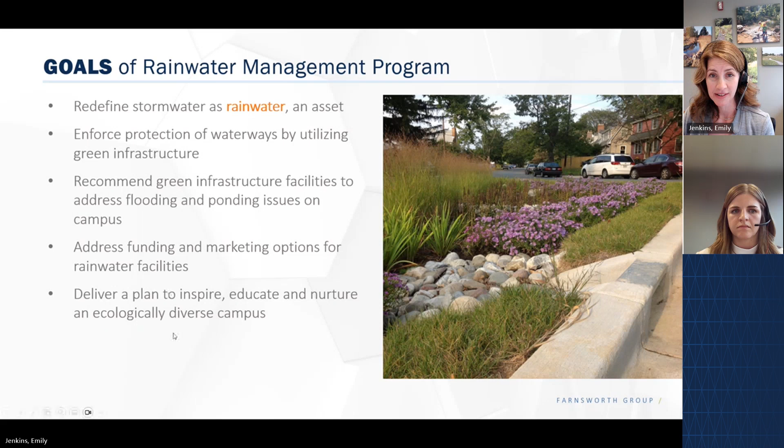Our approach consists of four main steps: first, to gather the data; next, to understand existing conditions; then to analyze proposed conditions; and finally, to compile everything together to create a plan that's usable and relevant.

And now Grace will walk you through how we gathered information to begin the process.

The first step was to review previous studies and plans, such as the Campus Master Plan and Campus Landscape Master Plan, and make sure our recommendations were consistent with those plans. For instance, we needed to be sure that we weren't proposing a new detention basin where one of those plans was proposing a new building.

We reviewed a GIS layer provided by the university and identified where we had questions, and from that, where we needed to gather additional survey data to fill in those gaps. The university has several green infrastructure facilities already, so we worked with them to track down that as-built information so we could model those facilities accurately.

Any remaining questions, we were able to pop over to campus, get eyes on the situation, and get the clarity we needed to keep moving forward.

And finally, we really needed to understand how the system behaved in the real world. So we held an open forum with campus facility managers where they could share their feedback on what they were seeing on a routine basis. We decided on a virtual platform where we introduced our project, and then facility managers could either drop a comment online on this wiki map I have shown here, or they could stay in the meeting and voice their opinions, thoughts, and issues of what they've been seeing. These forums provided really valuable discussion, all of which we summarized in the following table and chart on the next page.

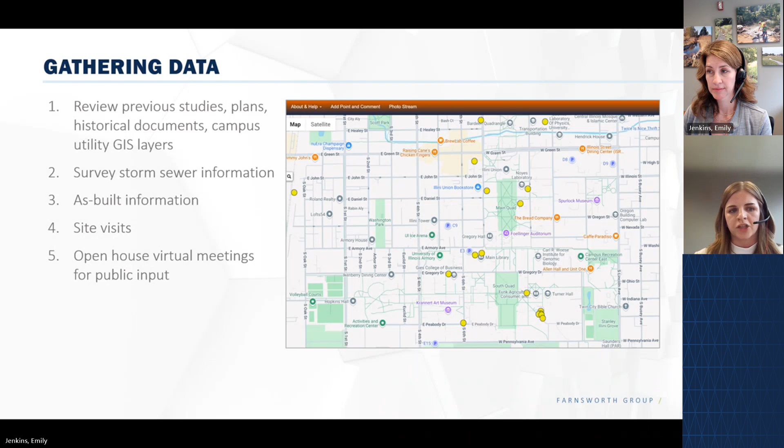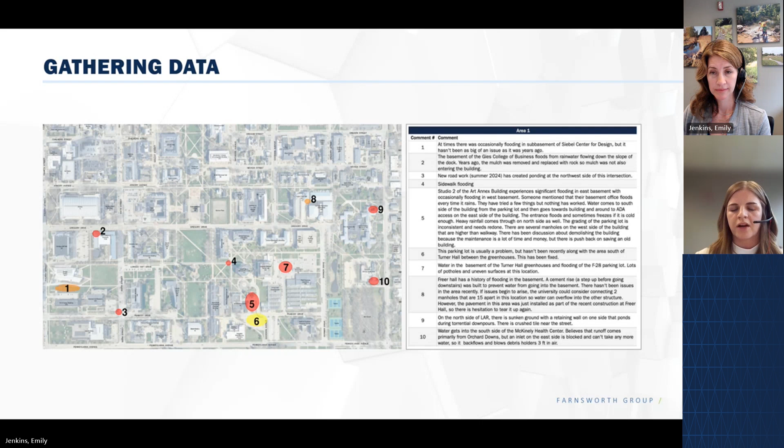With this map here, this helped us verify what we were seeing in our existing condition model. And then in the proposed phase, we made sure to come back to this map and make sure that our proposed recommendations were addressing all of these issues.

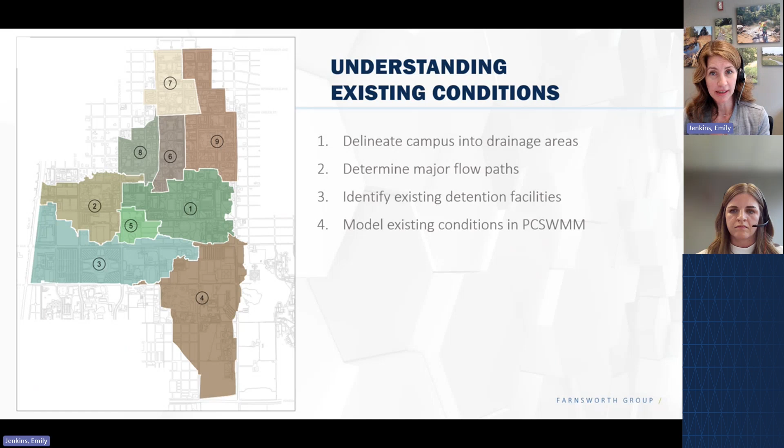After gathering all of the relevant data, we then began to put it together to understand how current conditions operate. We started by delineating the campus into 9 drainage areas, shown here in the different colored shapes. Each drainage area flows to a single outlet point and is similar to the regions that were identified in the campus landscape master plan.

Next, we identified major flow paths that are shown here in the dark black lines. Most of the drainage areas flow to the Boneyard Creek, either directly via overland flow or through storm sewer piping within Champaign, Urbana, or campus. The Boneyard Creek is in the northern part of the campus, shown here as a thin blue line on this map towards the upper part.

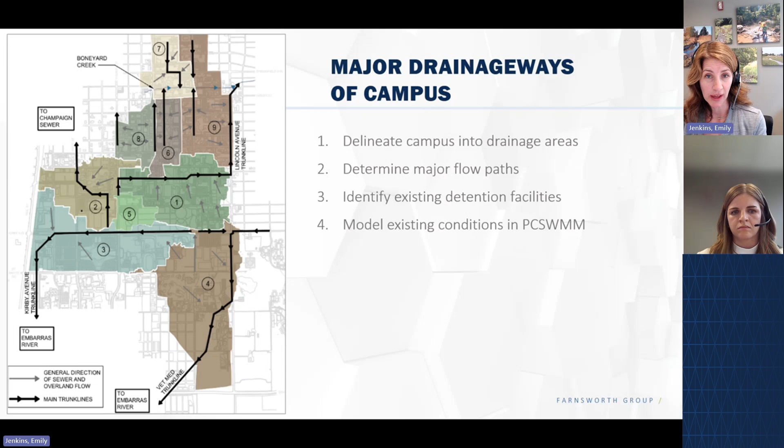Two areas, areas 3 and 4, drain south through large pipes called the Kirby Avenue trunk line and the Vet Med trunk line to the headwaters, or beginning, of the Embarras River.

All the existing detention facilities were then identified and mapped, and they're shown here in the shapes of cool colors. The university currently has several large regional facilities to manage rainwater, but they're not retaining and infiltrating enough rainwater to meet the current standards to protect downstream waterways.

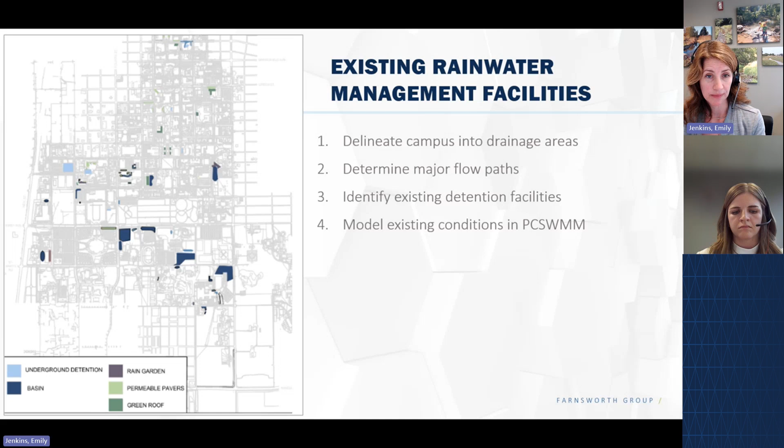Finally, we modeled the existing conditions within a modeling software called PCSWMM. All of the lines and circles shown here represent storm sewer manholes and pipes. This model can tell us where flooding occurs, which manholes surcharge—meaning which manholes have water coming out of the top—and what rate of water is leaving each area for a particular rain event. This model was used to identify locations of ponding and flooding, and was also used as the basis for adding proposed green infrastructure facilities to the campus to meet the university standards.

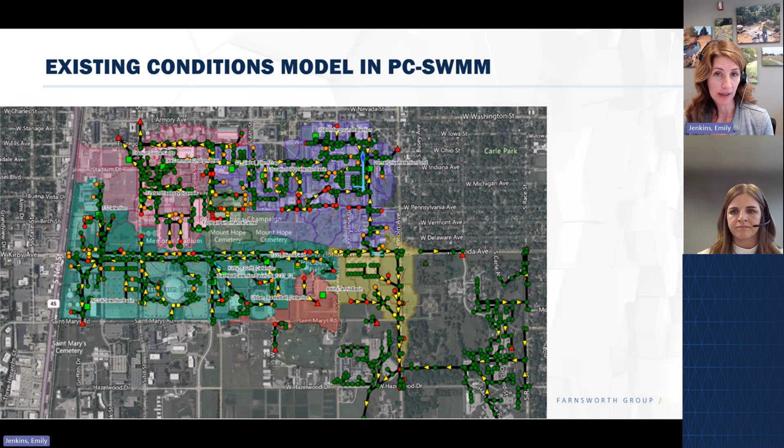A quick note about rainfall: the rainfall used in all of our analysis was the 100-year rain event, which has a 1% chance of happening every year. The most up-to-date published rainfall data were used for the analysis, which is 3.49 inches of rain falling within a 1-hour period.

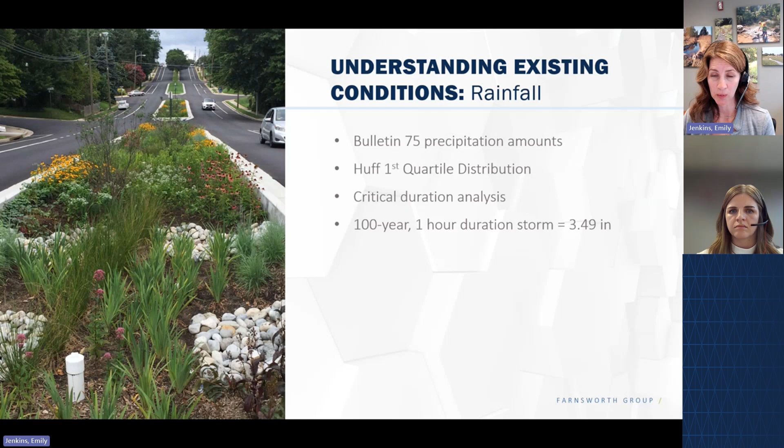Next we'll get into how we analyzed the proposed conditions. First I'll explain the basis for our analysis criteria, then we'll get into the method of how we recommended green infrastructure, as well as how those green infrastructure facilities were modeled. Then I'll walk you through the different green infrastructure facilities we are recommending throughout campus.

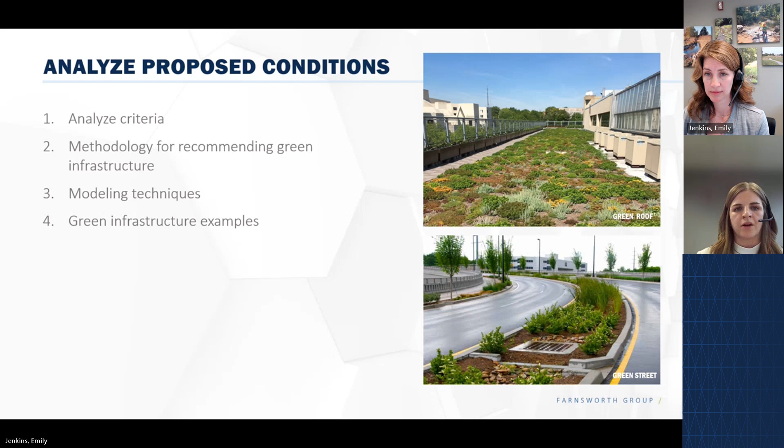The first step in analyzing our proposed conditions was to define our analysis criteria. Per university design criteria, our goal was to detain runoff from a 100-year storm—a storm with a chance of occurring once every 100 years—and then release that at a rate of 0.18 CFS per acre. So for instance, if your drainage area was 100 acres, our release rate goal would be 18 CFS.

Our goal was to accomplish all of this by implementing green infrastructure. This criteria is newer than a lot of the existing development throughout the university, so it was quite a difficult task. There's a bit of catching up to do, but ultimately, we were able to put together recommendations for each area that meet this criteria.

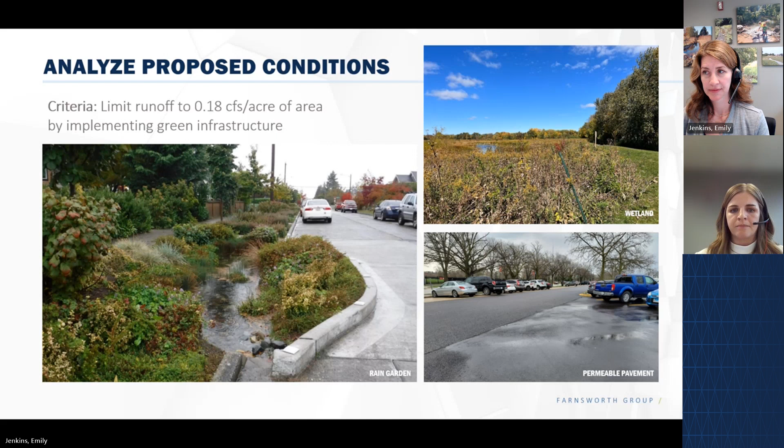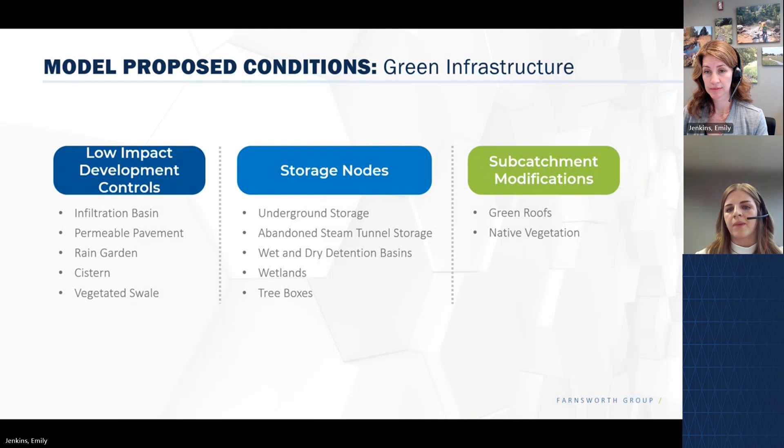So we used a wide range of green infrastructure to meet this criteria. Depending on the type of facility, we modeled it slightly differently in PCSWMM. Some were modeled using low impact development controls, or LIDs, in PCSWMM. More detention-based facilities were modeled using storage nodes, and green roofs and native vegetation were modeled by modifying the subcatchment.

So I'll walk you through the different green infrastructure facilities we're recommending. On the left here we have an infiltration basin, a storage area similar to a detention basin that can hold runoff, but it also includes a gravel storage layer and a layer of soil remediation to encourage infiltration back into the ground. We've recommended all of our infiltration basins throughout campus to be vegetated with native plants to further assist in that infiltration and evapotranspiration.

Permeable pavement can take the form of porous pavement, as shown at the State Farm Center, or permeable pavers, as I have shown here. Rainwater can pass through the pavement or between the cracks of the pavers into a gravel storage layer beneath, and can eventually infiltrate back into the soil, encouraging groundwater recharge.

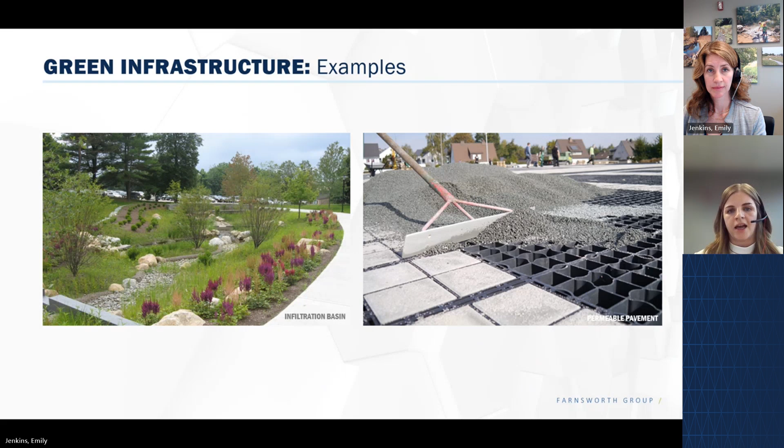In the top left here, this is a picture of the Red Oak Rain Garden on campus. A rain garden is a shallow, low-lying area with a soil remediation layer, as well as plants that can treat and store rainwater as it falls, and they're often seen around downspouts. Below that, cisterns or rain barrels are above ground storage containers that collect rainwater from roofs, gutters, and downspouts, and the water can be used for irrigation purposes. On the right, we have a vegetated swale, a broad, shallow channel planted with native vegetation or grasses, that can help convey water but also give the rainwater a chance to infiltrate into the ground.

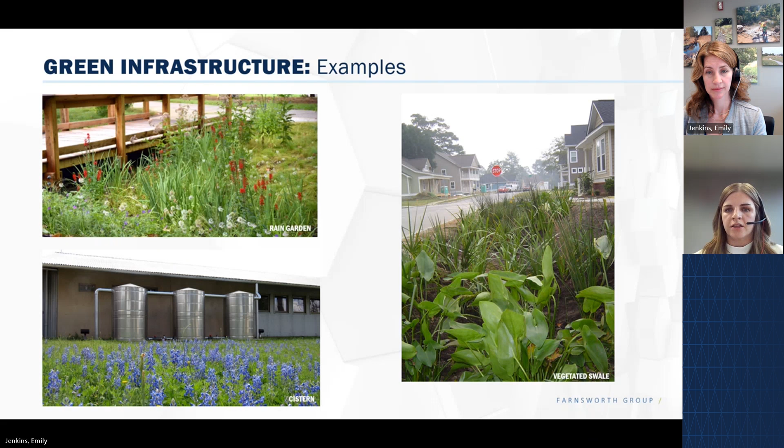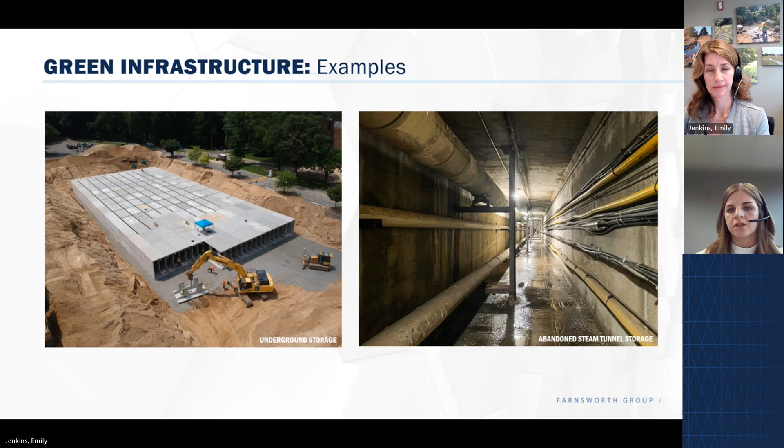Underground storage systems typically consist of large pipes or concrete boxes, as shown on the left, but they can be configured to meet the needs of the surrounding landscape. They're very beneficial because they can hold a large volume of water but still release it at a very slow and controlled rate to the downstream sewers. In certain areas throughout campus, we're recommending retrofitting abandoned steam tunnels to be used as underground storage systems, using this existing infrastructure as a great way to reduce construction costs of this facility long term.

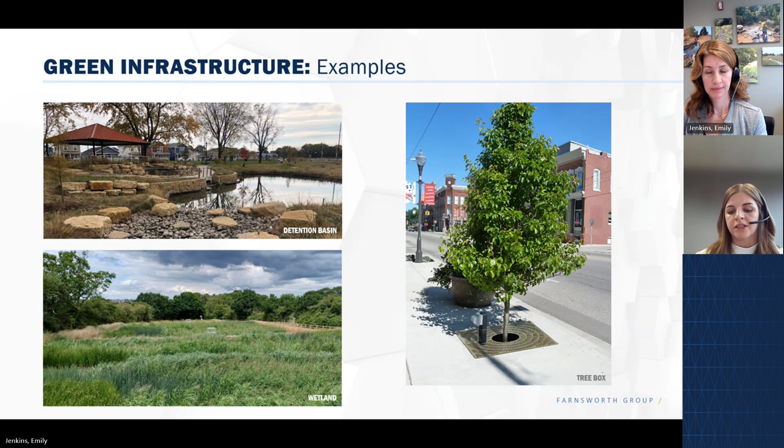Detention basins are above ground storage areas that detain water until it can be slowly released to the downstream system. They can be either wet, as shown here, or dry, and can include walking paths and shelters to add recreational value. A wetland is similar to a detention basin, but includes a soil remediation layer that encourages additional infiltration. It also holds a shallow depth of water for wetland plants to grow and to provide habitat for wildlife. On the right, we have a tree box, another type of green storage system, consisting of a tree planted in engineered soil media contained in a box underground. These are typically seen in parking lots, sidewalks, or adjacent to streets, and they're designed to collect that first flush, or initial runoff, after a rain event and treat the pollutants prior to discharging into the subsoil or back into the sewer system.

Green roofs are typically constructed on buildings with relatively flat roofs that can support the additional load of the soil. Green roofs can be planted with sedums and succulents, or they can even be transformed into an urban rooftop farm. They reduce the amount of impervious area, provide additional rainwater storage, and help cool the roof, reducing the mechanical costs of the building.

A simple and effective way of managing rainwater is to plant areas with native plants. This native vegetation helps slow runoff down, allowing it to infiltrate back into the ground. It also encourages evapotranspiration, provides habitat for wildlife, and adds aesthetic value to the area. This is consistent with the recommendations in the campus landscape master plan to increase the use of native plants throughout campus.

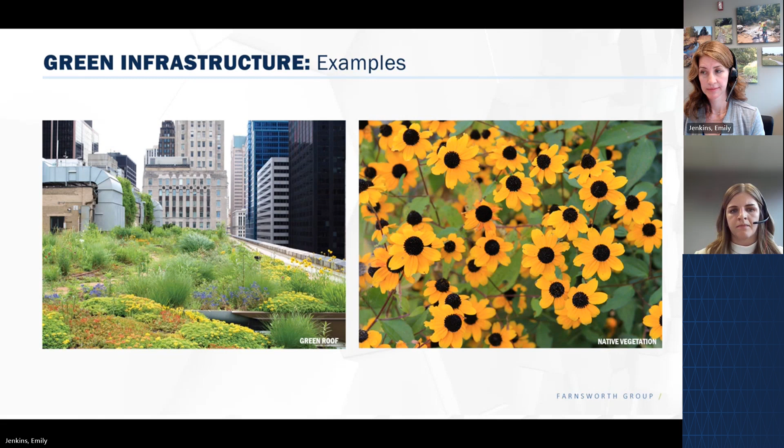So what does all of this mean? Up to this point, we've collected a lot of information about specific problems on campus. We know how the current system behaves, and we've added a lot of rainwater facilities to our existing model to manage the rainwater runoff from each area, decreasing the amount of runoff and flooding significantly. The first result to share is that each of the 9 proposed areas meet the university's standard of 0.18 CFS per acre with the recommendations we've provided. Grace and I will walk you through each area and show highlights of rainwater facilities recommended for each area in the next set of slides.

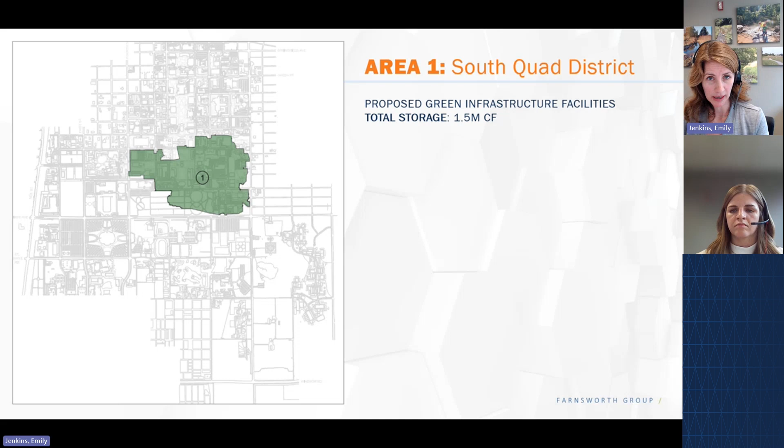So first of all, this is area 1, called the South Quad District. It includes the South Quad area from Mount Hope Cemetery to the south, to Nevada Street to the north. It includes PAR and FAR and everything to Lincoln Avenue on the east side, and stretches to 4th and Gregory on the west side.

This figure shows all of the proposed rainwater facilities throughout Area 1. Combined, they hold or infiltrate a total of 1.5 million cubic feet of water.

Quite a bit of runoff comes from the cemetery due to the slope of the land there. We suggest capturing a lot of that runoff from the cemetery to underground detention systems and the complete Green Street along Kirby Avenue. The existing release rate of Area 1 is 187 CFS.

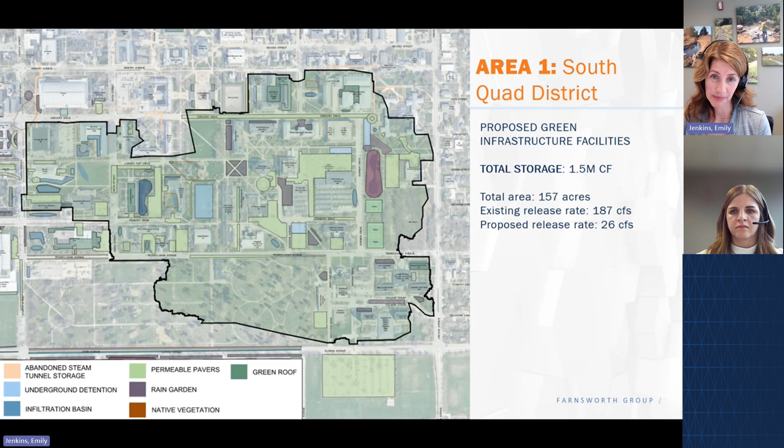These next couple of slides show a zoomed in version of different locations within Area 1. This first one is on the western side. The light green shapes are permeable pavement throughout most of the parking lots and along 6th Street that will manage the rainwater that falls directly on the large areas of pavement.

The brown clouds are native vegetation areas adjacent to the South Quad and near Temple Hoyne-Buell Hall that will filter and slow runoff, as well as encourage infiltration. The light blue rectangle is a large underground detention facility underneath the South Quad that will provide storage for all areas upstream of the facility, but will not be noticeable to university users.

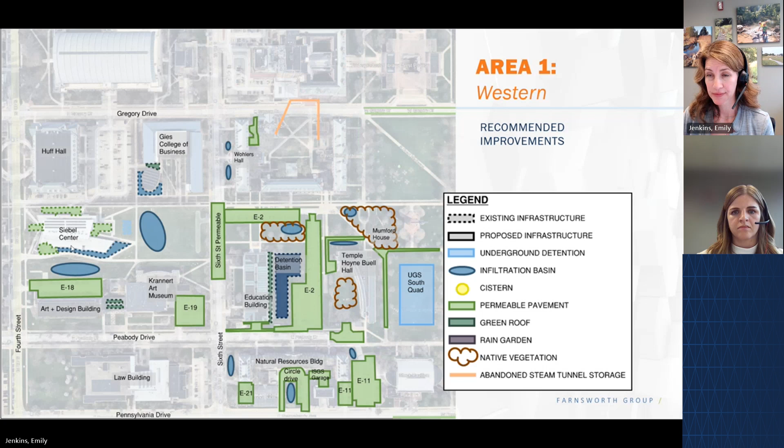In the eastern portion of Area 1, we are recommending a dense array of rainwater facilities. So Illini Grove is within this area and is helping to slow water down and infiltrate rainwater. Some proposed recommendations include green roofs on several buildings near CRCE and Bevier Hall, where Bevier Hall's green roof could be used for a produce garden for use in the cafe.

Other recommendations include utilizing abandoned steam tunnels as rainwater storage north of Allen Hall, multiple permeable parking lots, and a decorative permeable paver promenade sidewalk north of parking lot F28. Cisterns can also be used as irrigation to capture roof runoff from the greenhouses.

The Red Oak Rain Garden and Dorner Drive Retention Pond are shown on this map in the dotted outlines to denote that they are existing rainwater features. The Red Oak Rain Garden is an amazing example of the beauty and function green infrastructure facilities can provide.

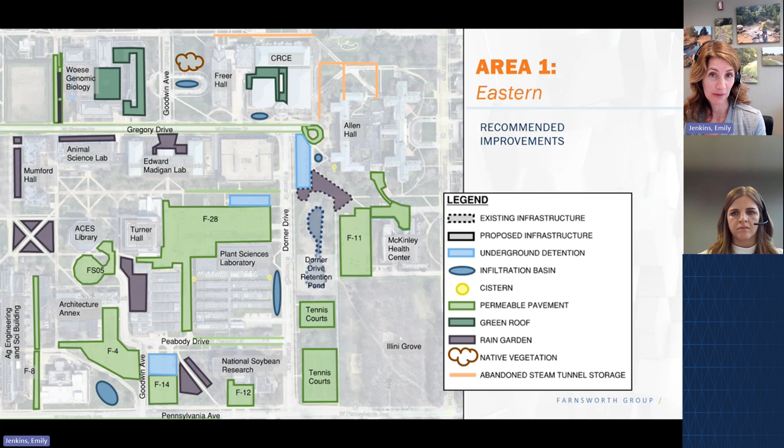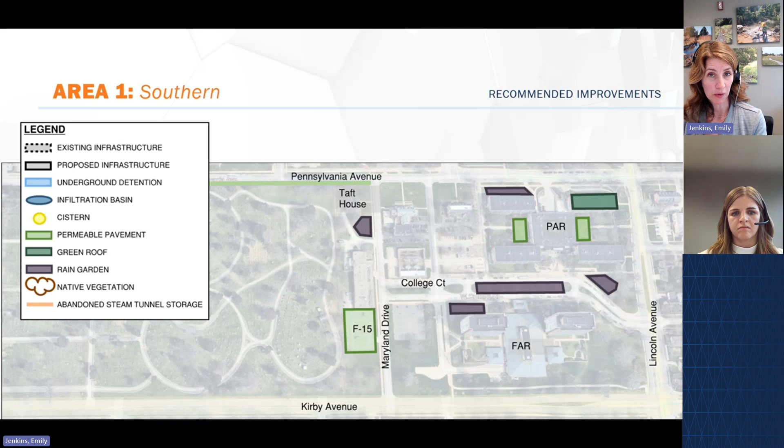In the southern portion of Area 1, we recommend rain gardens within the medians of College Court, as well as small areas of permeable pavement in the courtyards of PAR dorms. One building of PAR could be converted to a green roof as shown in that dark green color.

So Area 2 includes areas of university housing and Greek housing on the west side of campus. It includes the Eikenberry Commons, Armory, various athletic fields adjacent to Stadium Drive, and areas north of Memorial Stadium.

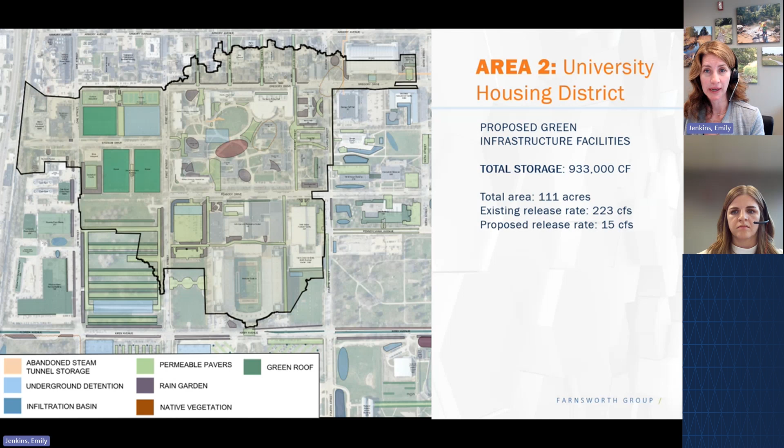This exhibit shows all of the proposed rainwater facilities recommended for Area 2. Combined, the green infrastructure facilities provide 933,000 cubic feet of storage and infiltration. The drainage area for this is 111 acres, and our proposed release rate with all of the proposed recommendations is 15 CFS.

In the eastern section near the Armory, we are recommending a couple rain gardens near the west end and a small underground detention storage facility below the southern sidewalk. We also recommend converting lot E4 to a permeable surface.

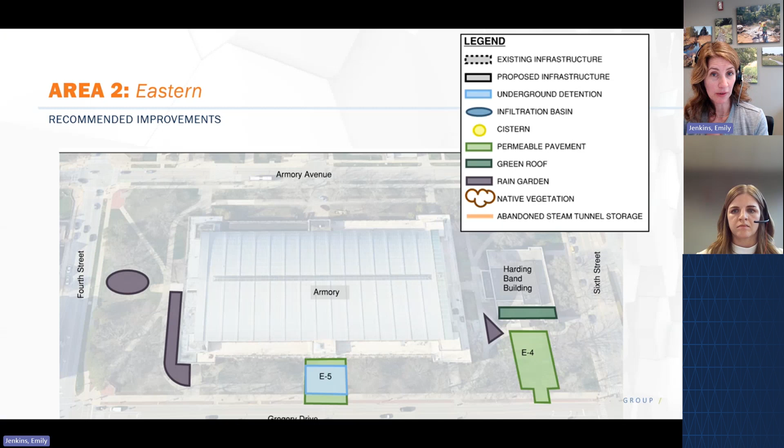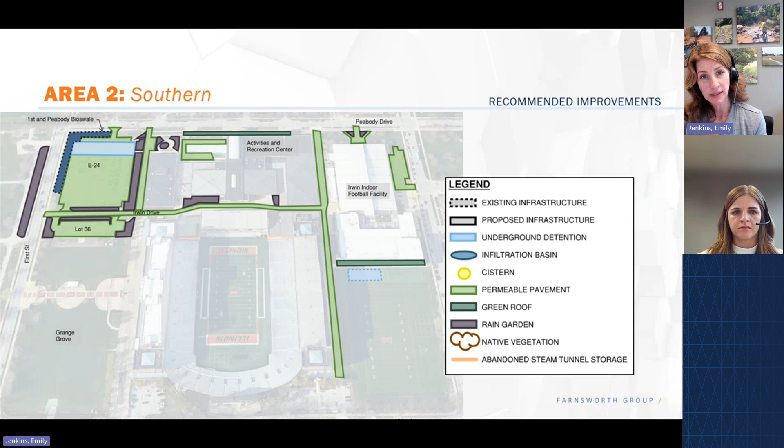Just north of Memorial Stadium, we are recommending converting the large parking lots to permeable pavement and adding rain gardens to the edges of them to provide additional runoff treatment and storage. Permeable pavement is an easy way to remove large portions of potential runoff from the storm sewer system and instead keep the rain in place where it can recharge the groundwater.

The Ikenberry Commons master plan had identified several green infrastructure facilities, and our rainwater program continues to build upon those ideas with a wetland in the center of the commons, native vegetation, and several rain gardens throughout the area, and sections of permeable pavement on Euclid Street and sidewalks.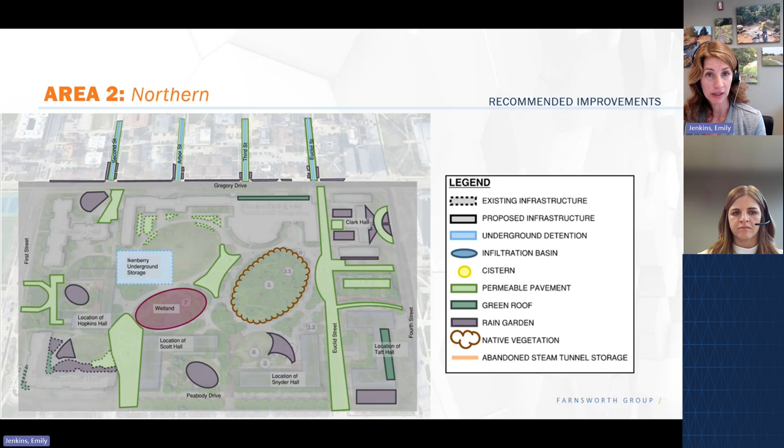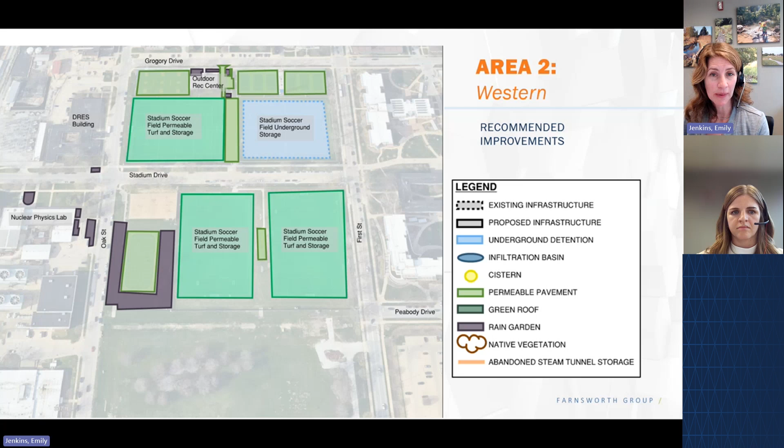In the western section of Area 2, the soccer fields are recommended to be converted to permeable turf and storage. This is an interesting product that provides a layer of rainwater storage beneath the turf, while the surface can be grass or artificial turf within a structured mesh layer. In addition, a large rain garden can be added to the area around the basketball courts to treat and infiltrate rainwater.

So Area 3, the athletic district, is bounded by Neil Street to the west and includes the industrial areas along the railroad from Goodwin to St. Mary's Road. It also includes the State Farm Center and the university baseball and softball fields.

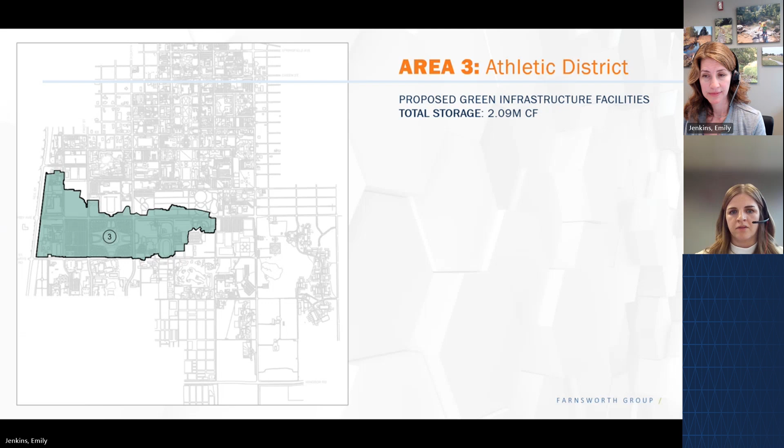So with all of the green infrastructure we are recommending, these facilities achieve a total of 2.09 million cubic feet of total storage. And we're also able to reduce the release rate by 92%, from 396 CFS to 33 CFS.

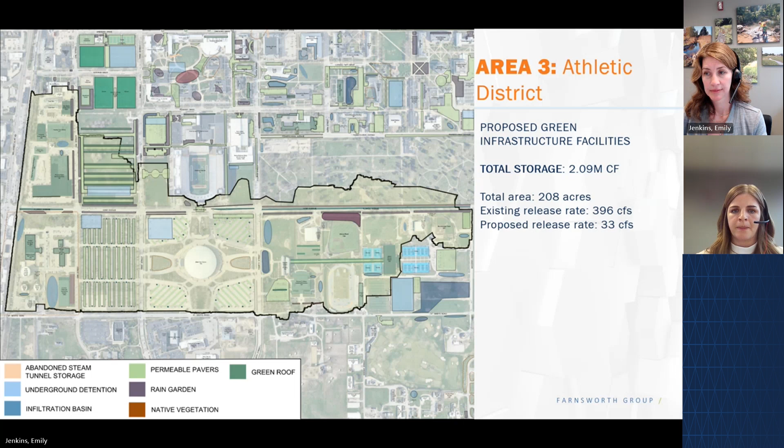In the northern section, we're recommending several large green roofs, but I also want to highlight the Stadium Terrace playing field. Here, we're recommending several below-ground improvements, including an underground storage system on the south side, as well as permeable grid pavers in the drive aisles of this field.

These pavers consist of a plastic grid system planted with soil and grass atop a gravel storage layer. This allows for infiltration and storage while still supporting vehicle traffic above it, so this field can still be used for tailgating in the future. We're also recommending adding trees alongside the drive aisles to provide additional cooling as well as evapotranspiration.

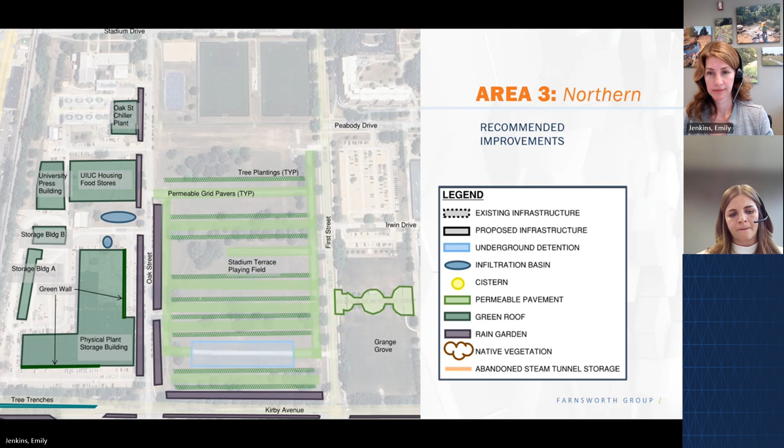In the western section, we have the E14 parking lot. Here, we're recommending underground storage to detain a large volume of runoff, coupled with permeable pavement in the drive aisles, as well as tree boxes throughout the parking lot.

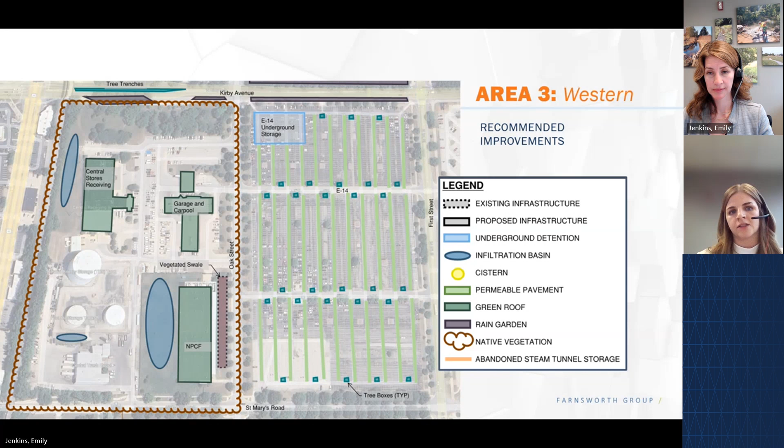Similar to Lot E14, in the central section we're recommending underground storage, permeable drive aisles, and tree boxes. The northeast lot already contains an existing section of permeable pavement, so we're really just expanding upon that idea throughout the entire State Farm lot.

We'll couple these improvements with a Green Street transformation along Kirby Avenue, which includes adding rain gardens and tree trenches.

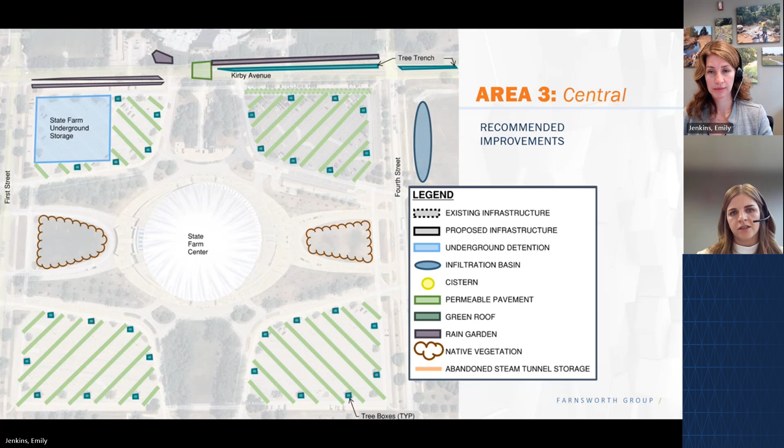In the eastern section, we propose continuing that Green Street transformation down Kirby Avenue. Between the baseball fields and the track and field, this is currently somewhat of an underutilized space, so we thought this would be a great location to incorporate artful rainwater to really maximize this area.

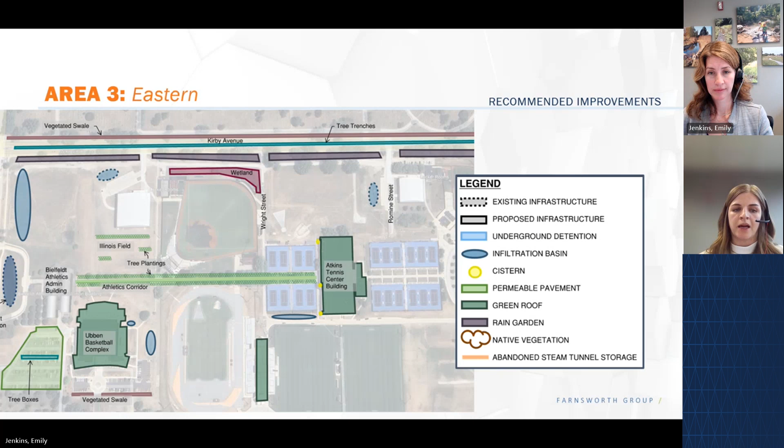In the bottom left-hand corner, you'll see a rendering of what this area could look like. We suggest adding permeable pavers in a very stately pattern, lined with rain gardens and trees to intercept rainfall, provide habitat, and add additional cooling.

These other images showcase other artful rainwater concepts throughout Area 3. In the upper left-hand corner, we're suggesting what we're calling a green wall, similar to a green roof, but containing vining plants that can add additional storage as well as beauty to this highly impervious area.

The Campus Landscape Master Plan mentioned a desire to make these crosswalks in this area more visible and more prominent. So here we're suggesting adding permeable pavers in the shape of a block I to show that Illini pride.

Similar to all of these ideas, we've aimed to incorporate artful rainwater throughout the entire campus. These concepts really highlight and celebrate the importance of rainwater, while also making it a beautiful and sustainable space for students and staff to enjoy.

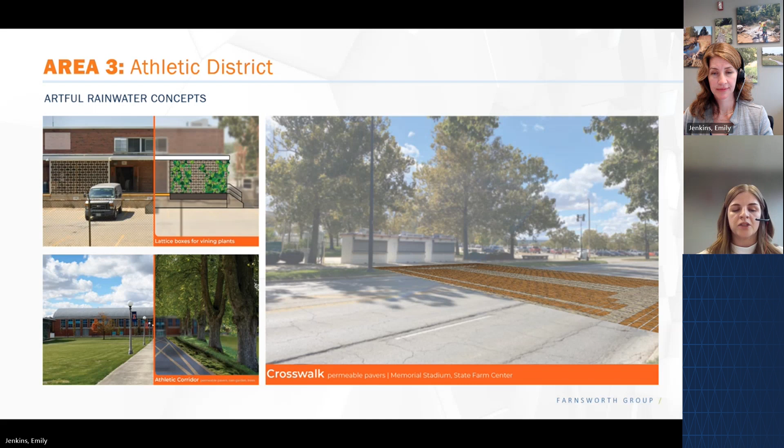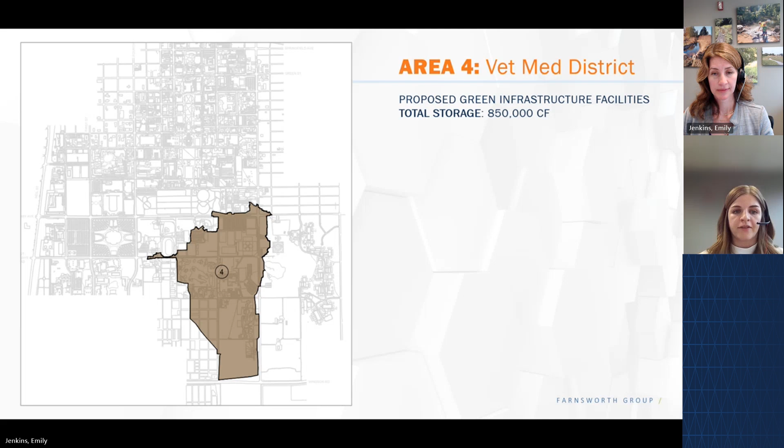Area 4, the Vet Med District, is bounded by Lincoln Avenue to the east and Windsor Road to the south. The Vet Med District includes a lot of open agricultural land, athletic fields, as well as the Vet Med campus.

You can see here that this area is not as densely packed with green infrastructure, but regardless, these recommended facilities store a total of 850,000 cubic feet of water and reduce the release rate all the way down to 0 CFS.

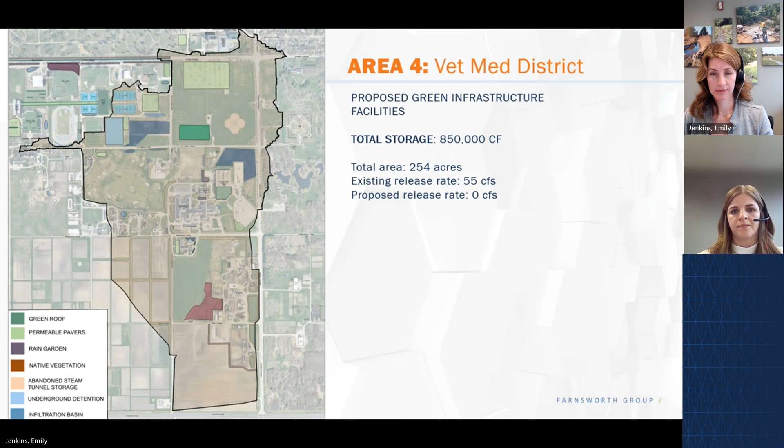In the northern portion of this area, we recommend areas of permeable pavement, as well as that permeable turf and storage that Emily had mentioned in Area 2.

One area I want to note is the storage facility at the soccer practice field. This will function as a shallow underground cistern, so it can collect rainwater, and then that water can be used to irrigate the soccer fields as needed.

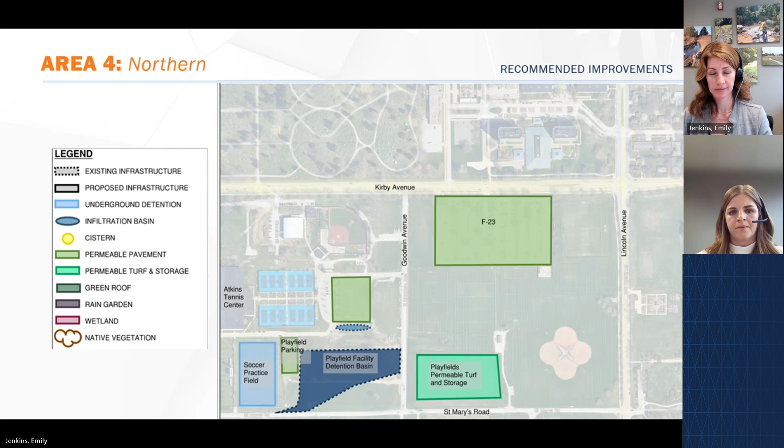We're able to manage most of the runoff from this area by routing the trunk line down Lincoln Avenue to the wetland shown here in magenta. This wetland provides most of the detention we need for this area, as well as additional water quality benefits.

However, if built in this recommended location, the proposed equestrian facility from the Campus Landscape Master Plan will need to be relocated.

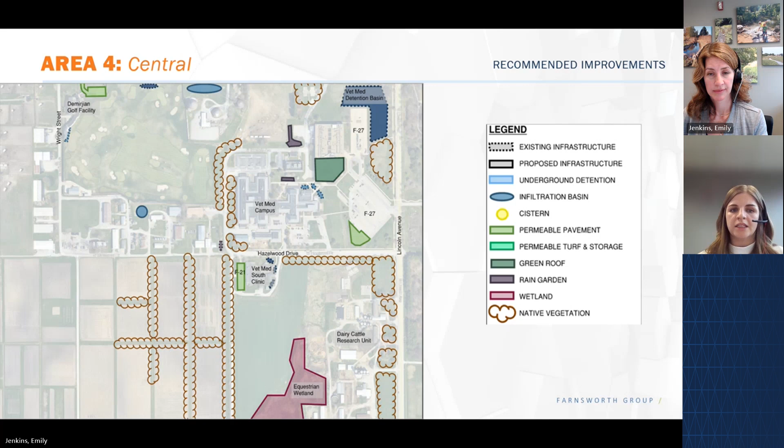These large agricultural areas lend themselves really nicely to using more native vegetation to slow the runoff down. We've also recommended a vegetated swale throughout the farmland to provide additional storage here as well.

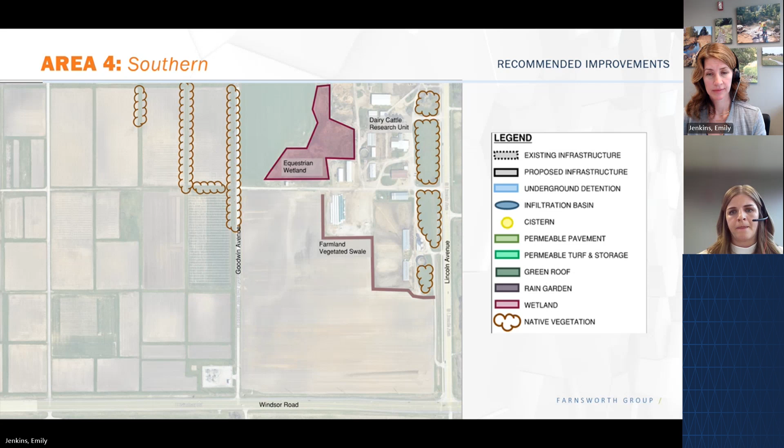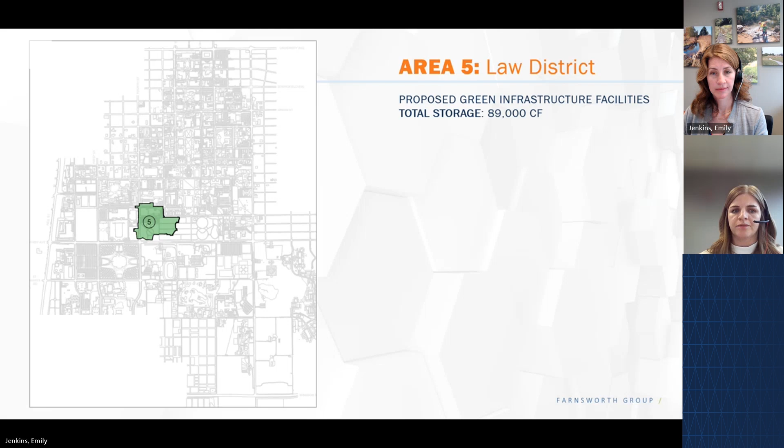Area 5, the Law District, includes Mount Hope Cemetery, the Law Building, as well as the E14 parking garage. Mount Hope Cemetery is not owned by the university, so improvements were not suggested there.

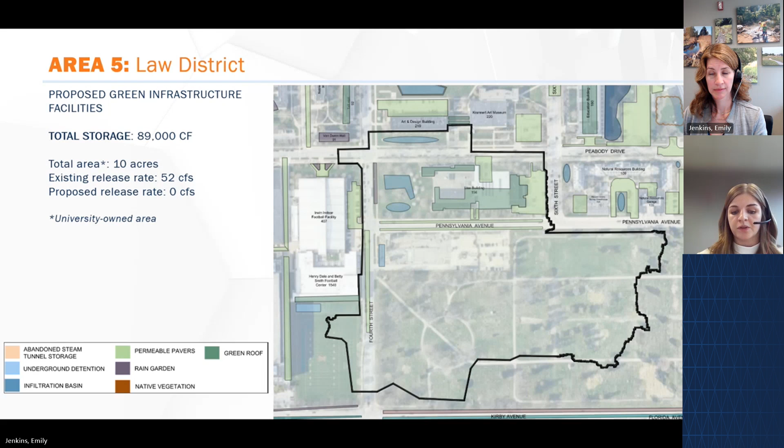Regardless, the facilities that we did recommend can store a total of 89,000 cubic feet of water and also reduce the release rate down to 0 CFS.

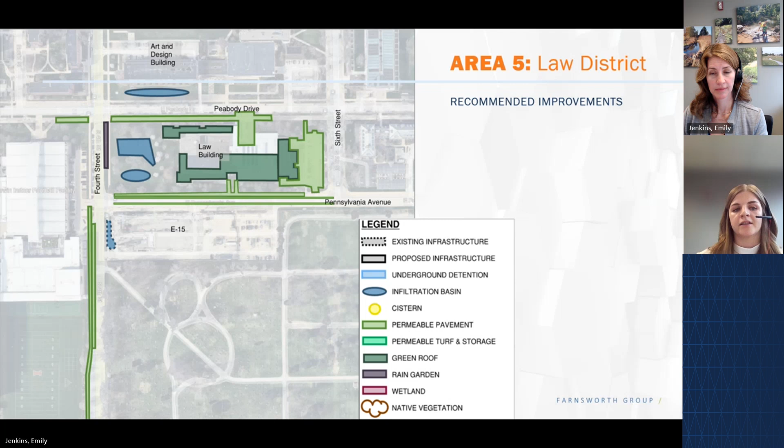This area includes conversion of parking lots, sidewalks, bike paths, and street parking lanes to permeable pavement. These areas are important to intercept runoff from the Mount Hope Cemetery, since green infrastructure can't be added there itself. We recommend adding a green roof to the law building, as well as an infiltration basin to the west, which can be optimized to serve as an outdoor study space for students.

Area 6 is the main quad district. This area, as with Areas 7, 8, and 9, were shown in the Campus Landscape Master Plan. The same green infrastructure facilities from the Campus Landscape Master Plan are shown here, just with storage calculations performed on them. The main quad district encompasses the center of campus, bounded by Armory Avenue on the south, Wright Street to the west, Green Street on the north, and South Matthews Avenue on the east. The open turf area is its centerpiece, with Foellinger Auditorium at its south end and the Illini Union at its north end.

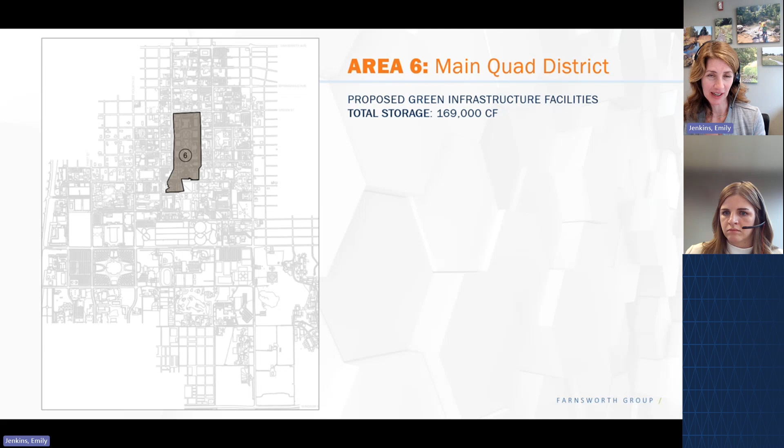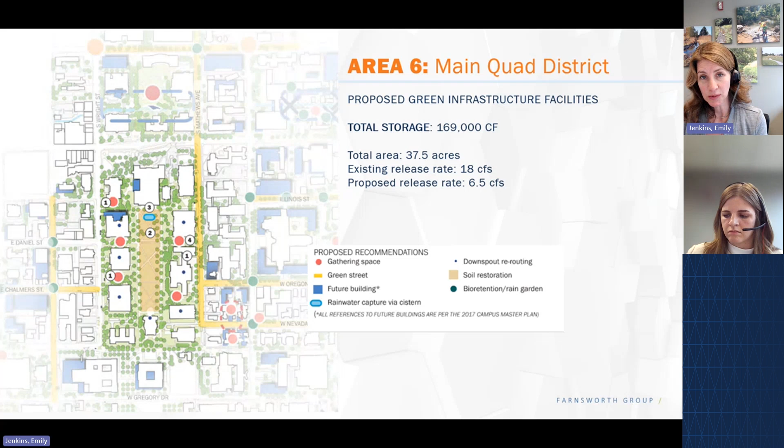Within the main quad area, the recommended improvements focus on courtyard enhancements with permeable pavement and aesthetics, turf restoration along open space gathering places, soil restoration of the main quad open area, and an underground cistern to store rainwater. Tree wells are also proposed along the complete green streets along the perimeter of Area 6. The total storage of rainwater within Area 6 is 169,000 cubic feet. The proposed release rate meets the standard at 6.5 CFS.

Area 7 is the engineering quad district, located at the north end of campus. It is bounded by Green Street to the south, 6th Street and Wright Street on the west, University Avenue on the north, and Matthews Avenue and Goodwin on the east. The North Quad and Bardeen Quad are both included in Area 7.

The main focus of rainwater management for Area 7 is a stream restoration along the Boneyard Creek, which also includes a small wetland adjacent to the stream. An underground cistern within the North Quad is also recommended, as well as permeable pavement along sidewalks and parking lots. The total amount stored in this area is 8,000 cubic feet, achieving a release rate of 10.6 CFS, meeting the university standards.

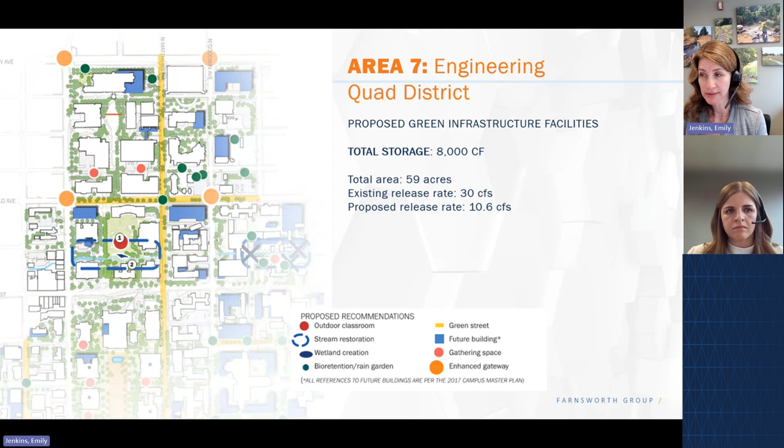Area 8 is the Urban Town and Gown District, straight west of the main quad, bounded by Armory Avenue on the south, 4th Street on the west, Green Street to the north, and Wright Street to the east.

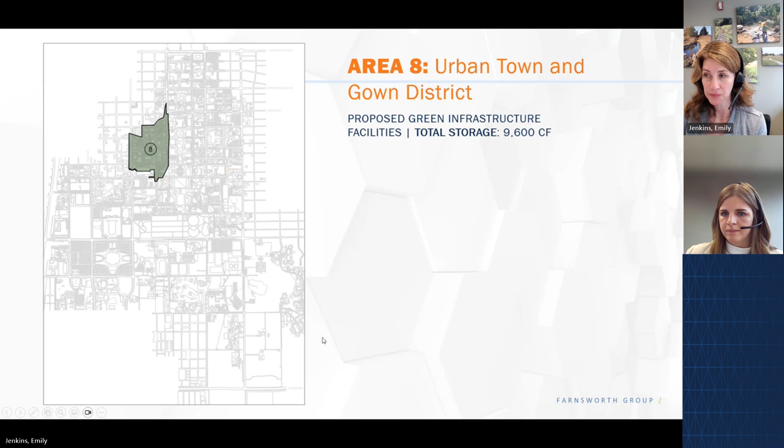The rainwater facilities recommended in this area are centered on a streetscape revitalization. Streets will incorporate permeable pavement in parking lanes, shoulders, or across the full street. Bioretention cells will line streets and provide infiltration and habitat along the street corridors, and tree boxes will support trees for shading, cooling, and rainwater storage. The total storage for this area is 9,600 cubic feet, which will reduce the rate of water leaving this area from 21 CFS to 6.9 CFS.

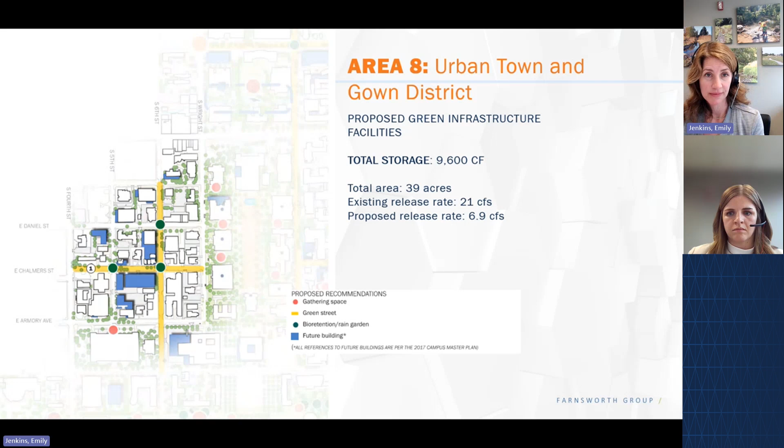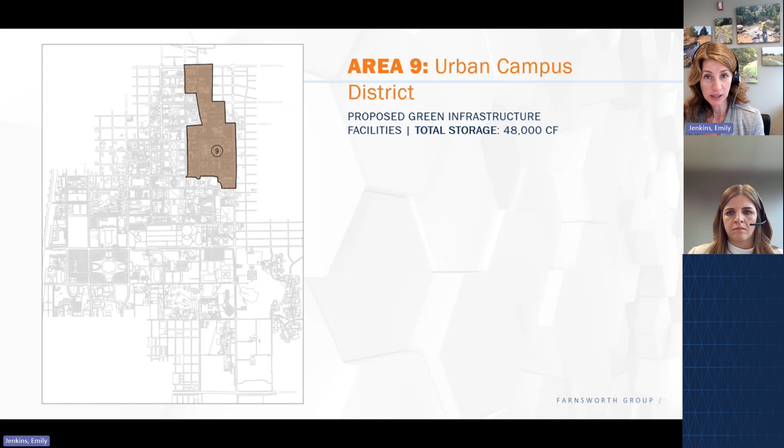Area 9 is the Urban Campus District on the north side of campus. This area is bounded by Nevada Street on the south, Matthews Street on the west, University to the north, and Lincoln Avenue on the east. The Boneyard Creek runs through its north end, bisecting the area.

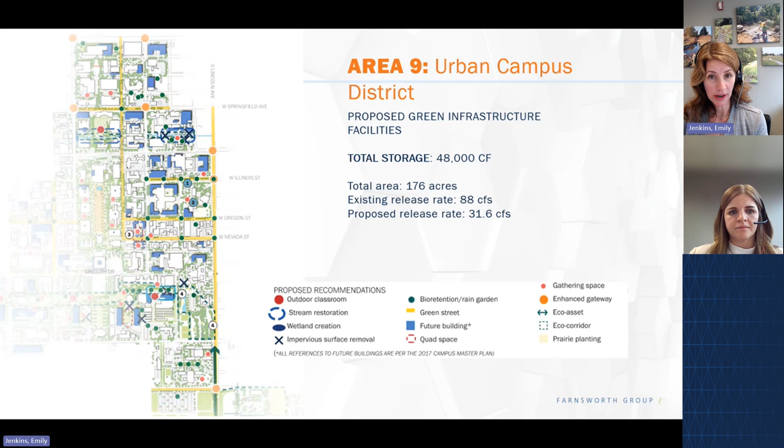Recommendations within Area 9 are characterized by a continuation of the stream and wetland enhancements along the Boneyard, daylighting portions of the Boneyard Creek, permeable pavement within streets, and rain gardens lining streets to capture overland flow from buildings and sidewalks. Also, underground detention areas to store and slow rainwater runoff.

Overall, it's a lot of results over a large campus area. So how did we compile everything to create a usable plan?

First of all, we made the plan very visual with several maps, exhibits, and figures showing several of the maps we've shown you. All of the technical information and methodology is located in the appendix, so it's available for those who wish to know more. But within the body of the report, we rely on maps, graphs, and tables to really tell the story.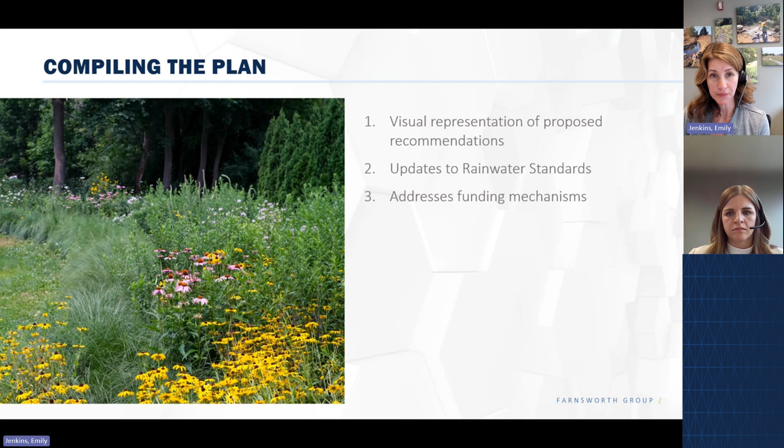Next, in addition to the recommendations for green infrastructure, we also made recommendations for improvements to the university's standards associated with rainwater and runoff. For runoff calculations, we propose that the 0.18 CFS per acre standard be met for development and redevelopment within campus. We also recommend reducing the runoff rate for the 2-year storm in addition to the 100-year storm.

The 2-year storm event is the rainfall that has a 50% chance of occurring each year. As a more frequent rain event, this size of storm can cause significant damage to downstream waterways through erosion and flooding, so it's important to manage this small size storm as well as the large events.

The methods acceptable to the university are outlined in detail in our revised standard recommendations so that all developers use the same techniques in their calculations of runoff and storage volumes. The standards section on green infrastructure has several suggestions to provide guidance on design criteria and maintenance for all the green infrastructure types we mentioned today. Providing this information to developers will encourage more installations of green infrastructure and consistency between designs so university staff can maintain all the facilities in an efficient, consistent manner.

Finally, the erosion and sediment control standards include several recommendations to add more statements regarding temporary and permanent seeding to achieve 70% stabilization of the site before a contractor can finish a project. More stringent standards on the use and limits of erosion containment controls like silt fences, straw bales, and silt socks are also recommended. All recommendations have been given to facilities and services for review and eventual approval and implementation.

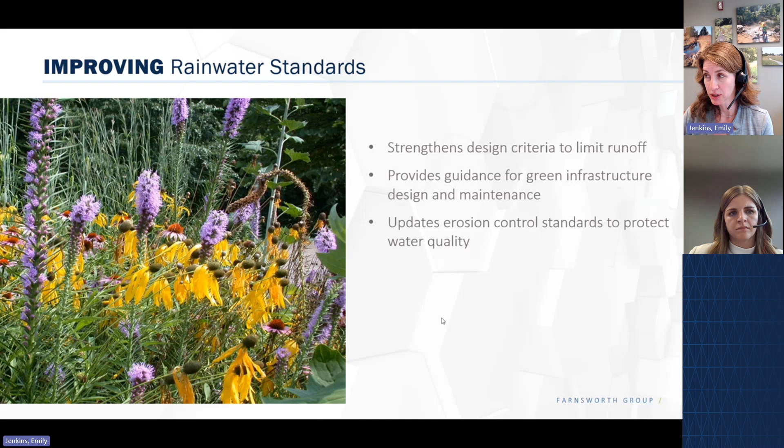We've shown you a lot of recommendations across the campus to manage rainwater and runoff. One big question in your mind might be, how does the university intend to pay for these projects? With the updates to the standards requiring new development and redevelopment to meet the 0.18 CFS per acre, along with this plan that details what type of rainwater management facility should go where and how big it should be, developers can incorporate many of these projects into new or redevelopment projects on campus.

Facilities and services can work with the developing client to ensure rainwater is being stored, infiltrated, or detained in some manner to reduce the overall release rates of the project site and ultimately the area of campus. These projects will be built over many years as new projects are developed on campus. There is also an opportunity for facilities and services to build some of these larger regional rainwater projects as standalone projects. For those situations, the plan provides several grant and loan options that the university can apply to for financial assistance.

In conclusion, ultimately, the goal of this program is to challenge and change the mindsets of university users to see rainwater facilities and green infrastructure as part of the fabric of the campus. Several small installations of green infrastructure facilities can effectively manage rainwater runoff while providing additional benefits like reducing urban temperature, providing habitat for pollinators, small birds and mammals, and adding beauty and created spaces to the landscape.